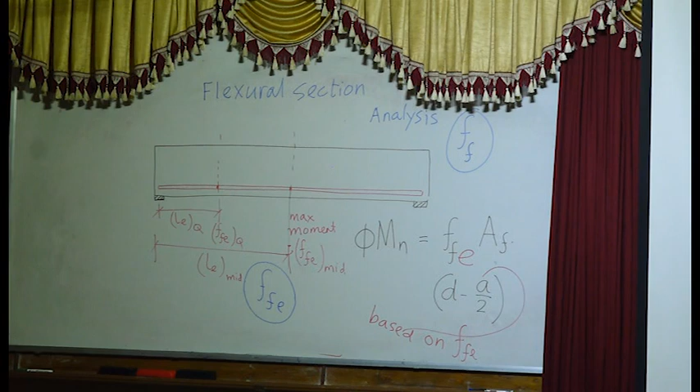Do these calculations 1 or 2 times and you will become an expert. It's a very simple calculation. That's all.

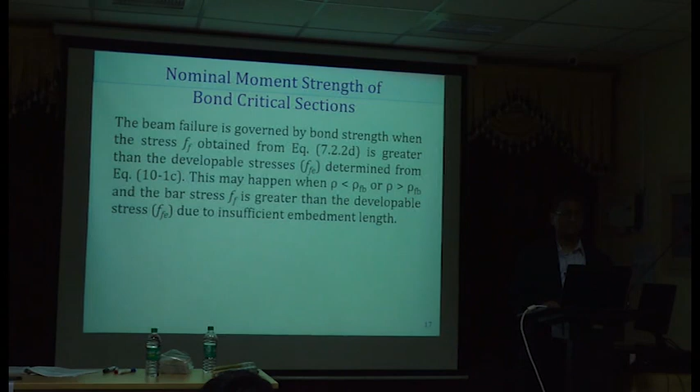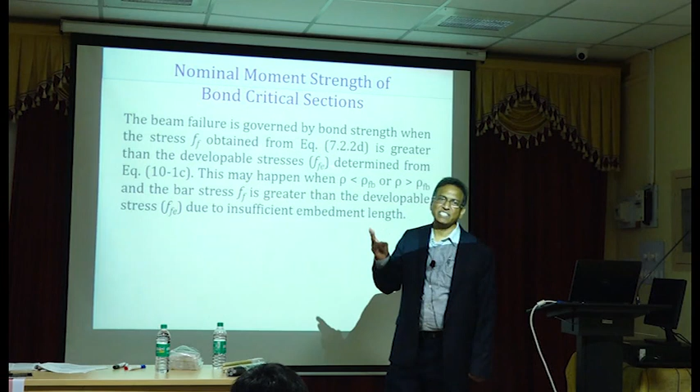Again, there is a problem in the sense that by using FFE, it can become an under-reinforced section. That's a possibility, but you have to consider all those possibilities.

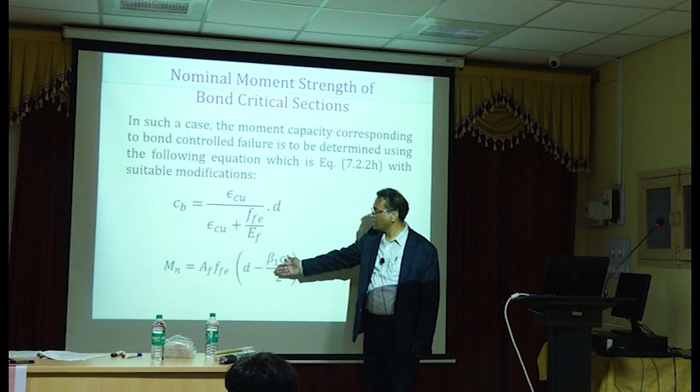And then you have the same equation, I wrote it up there, same equation in a different form. They have your moment capacity Mn, nominal moment strength. Mn equals AF FFE times D minus beta 1 CB over 2.

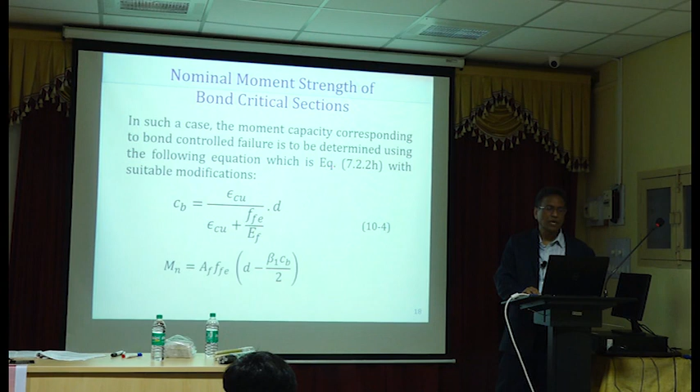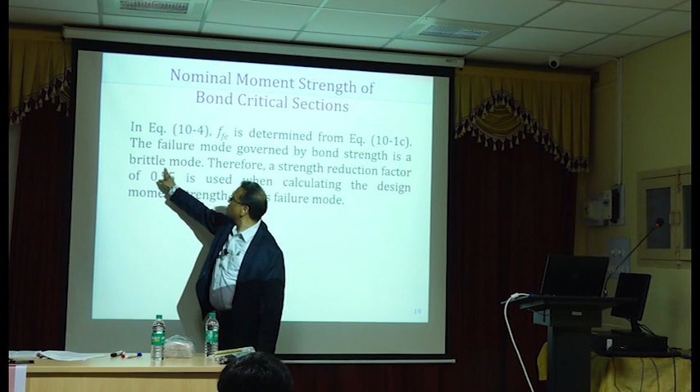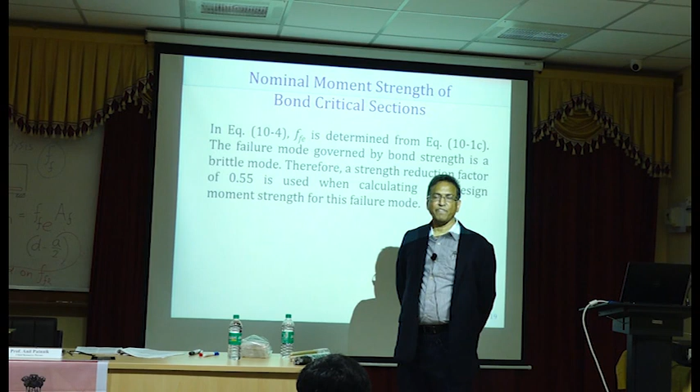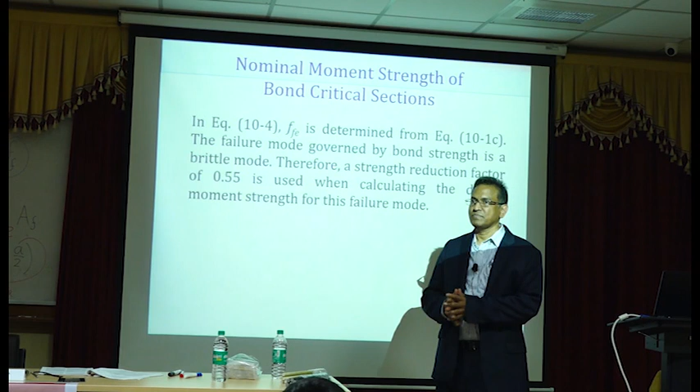Now, the strength reduction factor will therefore become brittle mode, so in the moment strength equation you must use a phi factor of 0.55. If you are adjusting your moment to include FFE and not FF, then it becomes a brittle mode of failure, and the phi factor is 0.55 instead of 0.65. Is that clear? Very good, thank you.

So there is also another equation. It's just based on test results, and you have the development length of bent bars. This is for bent bars.

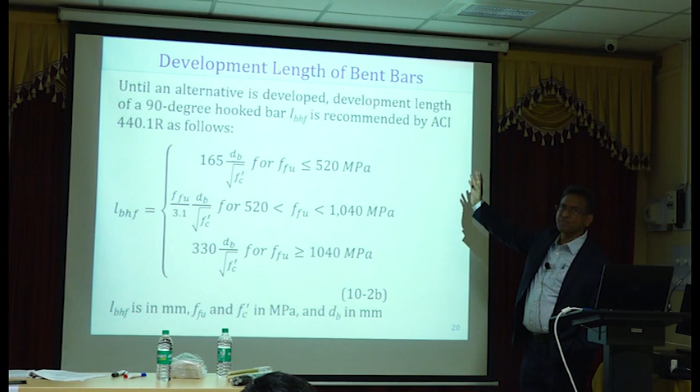You have these 3 equations for different FFU values, and these are all in SI units, so you can use them directly. F prime C is in MPa, LBHF is in millimeter, and so on. These are in SI units, you can plug in the numbers and get your development length for bent bars. So if you are designing your shear reinforcement with bends, this is what you will use.

Your FFU is actually based on the actual stress in your shear reinforcement, which is governed by a strain of 0.004. So it's quite likely you will use this equation for that.

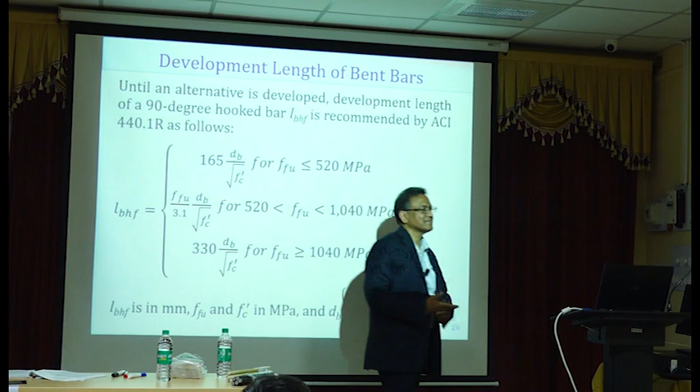No heating also. Thermoset you cannot even heat and bend. Only for thermoplastic you can heat and bend. But you can ask the producer to make a stirrup or shear reinforcement with the bends. They can make it. Once it is made, you cannot bend, you cannot straighten, you cannot do anything. Make sense? Yeah.

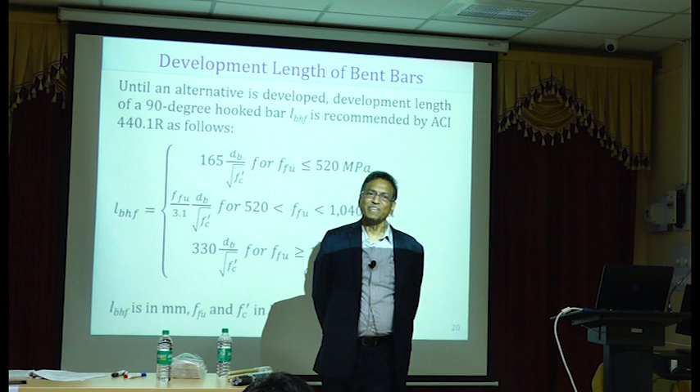So of course we have standard hooks in ACI, and also I'm sure it's in IS 456, and so you need to show this extension, which is 12 db in case of FRP, right? I showed you a small sketch. This is 12 db, and your development length LDH is from here to here.

It's not very clear, I'm sorry, the picture is not so clear, but the development length is from this edge to here, that's what LDH is. And if you have this type of 180-degree hook, then LDH is from this point surface to here, LDH. All right? What is the use?

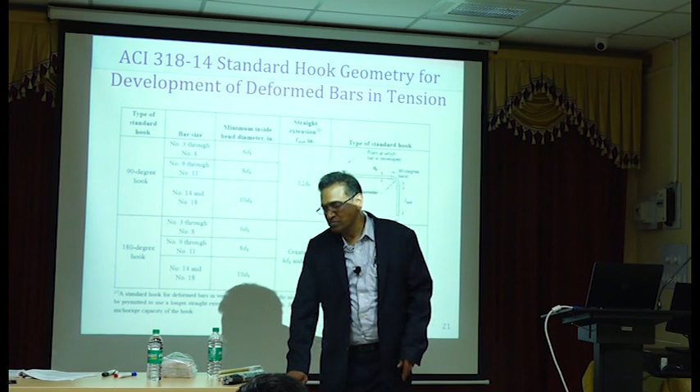What is the use of the extra length? So if you are only taking that limiting length, what is the use of extending it? That's a very good question. But... yes, that's a good question. Let me think.

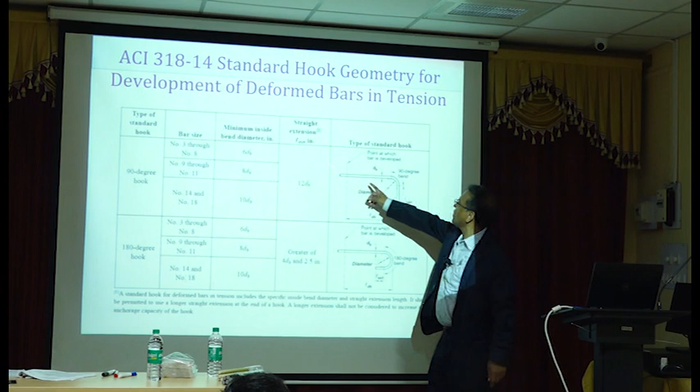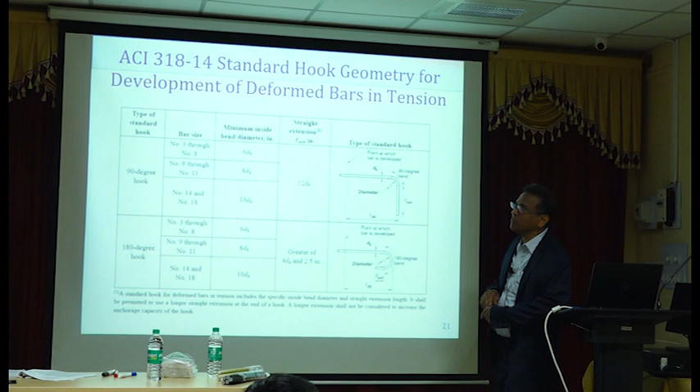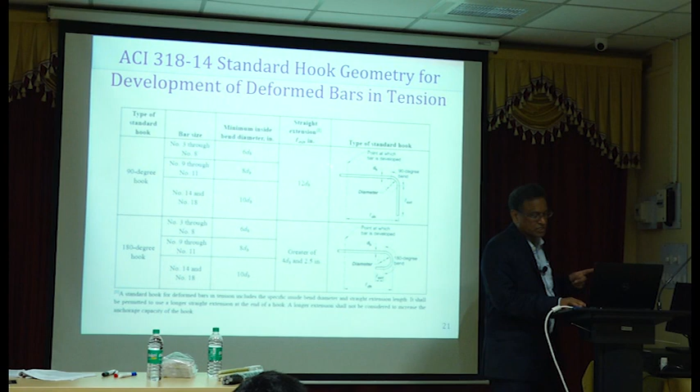What he's saying is, if you are considering this as your LDH, then what's the point of this extension? But if you have a straight length - let me put it this way - if you are using straight development length, that will be much, much larger than the one with a bent profile. So if you use this equation, you will get smaller values.

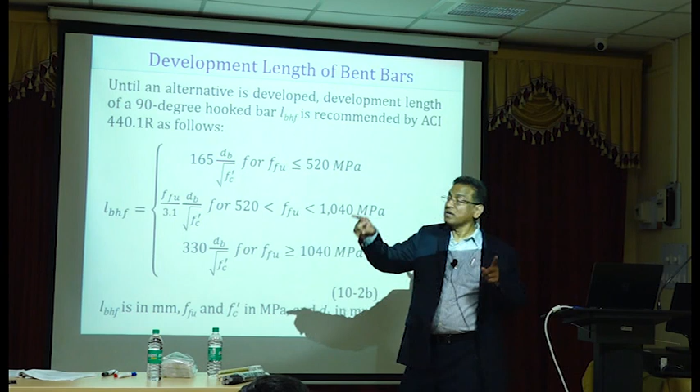Whereas this is with the bend, this is the development length of bent bars, right? So if you do the numbers, this will be a smaller value. Whereas if you use straight development length using that embedment length equation, that will be much longer. So that is the difference.

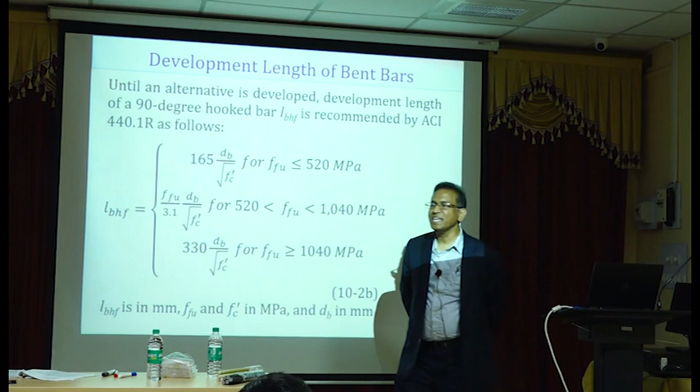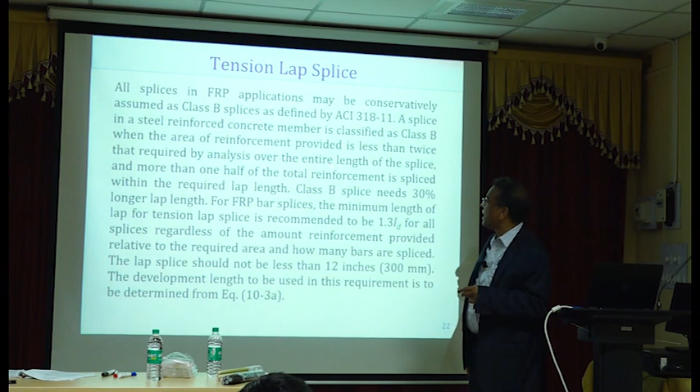So, lap splices - I'm not aware of what IS 456 uses for this. In case of ACI, they have two types of classes, class A and class B, and you define your lap splice based on the amount of reinforcement you provide in that lap.

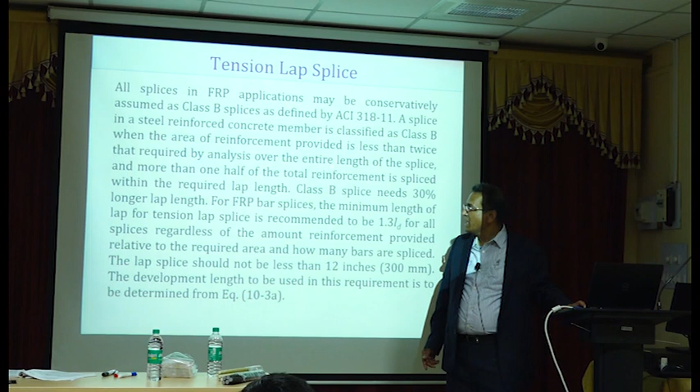So your lap splice area of steel provided over area of steel required, depending on your moment strength requirement, gives your AS required. In most cases, because you're not changing your bars over the length, the same bar continues all the way, so almost always you'll have a larger area provided than required.

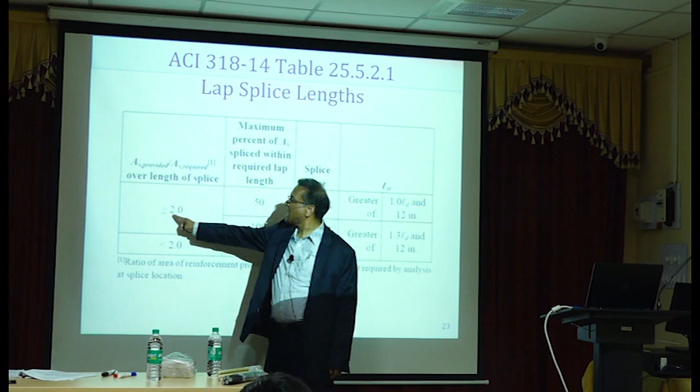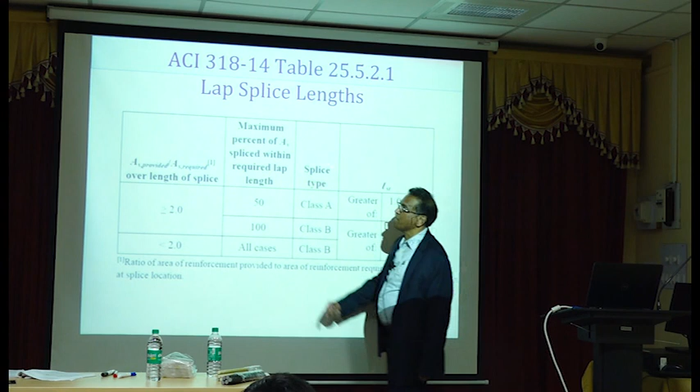So if that ratio is greater than or equal to 2, then you classify that splice type based on AS provided to AS required. If it is less than 2, it's always classified as class B.

I didn't have time to check this requirement in IS 456, but if you are familiar with that, please explain to others if that's something you know really well.

But in case of ACI, this is what we have, class A and class B. All the bars where AS provided over AS required is less than 2 are classified as class B. So they are saying for FRP, just use class B for everything.

Class B will have a larger lap length. So larger lap length is defined as 1.3 times LD.

So LD is given by the other equation, remember, based on FFE. That equation can be used for lap length calculation, but you must use the 1.3 factor - it has to be 30% longer than the development length you calculated using the equation.

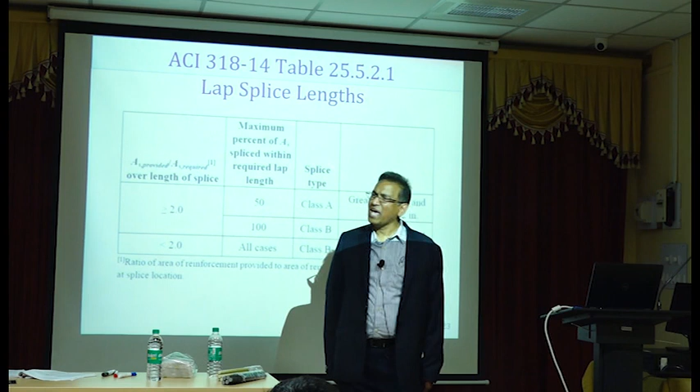You don't have to tie them together, right? These days they are having epoxy coated steel binders or even plastic binders, which they use.

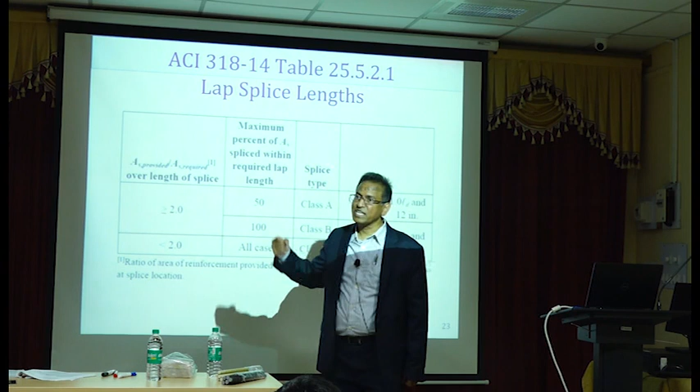But actually the whole concept of splice is you don't really have to tie them together. Even if you don't tie them together, even if there is a gap, or at least it is in contact but not tied, that's good enough for splice. That's the whole point - pull-out strength is based on individual bar. You don't have to tie it. If you weld it, it's great, but that's not going to happen in FRP.

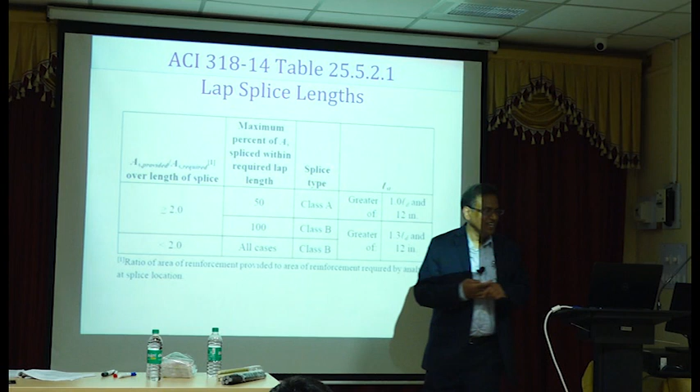And the development equation is just a rearrangement of the same equation for FFE - that's all, there is no difference. It's just exactly the same as what we had in that equation for FFE, just rearranged, and that's what you get.

That's the development length. And for FRP bars, unfortunately, we have to use class B, which is 1.3 times LD. This gives you the actual development length, and 1.3 is what is required by ACI for detailing.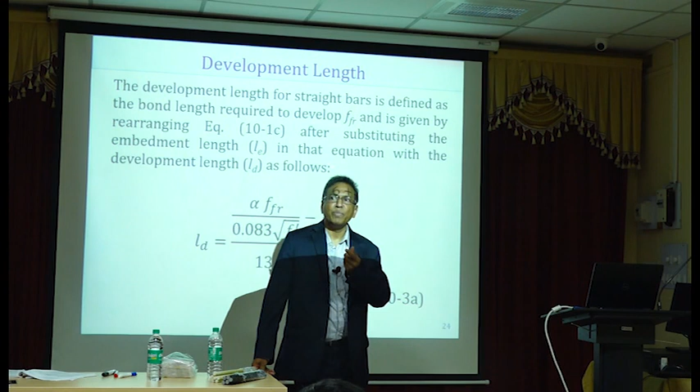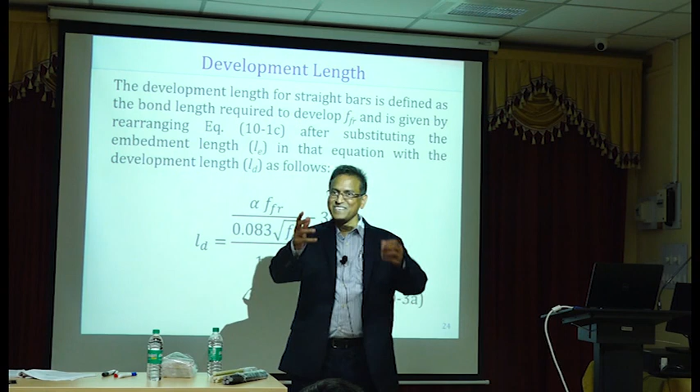Now I think in your teaching also you should try to incorporate that. It makes a lot of difference, because upfront when you're starting the class, you bring all your students to the same thinking. Then you move on, then you build on. It's a very effective tool that I use in my classes also - it's very effective, I know that.